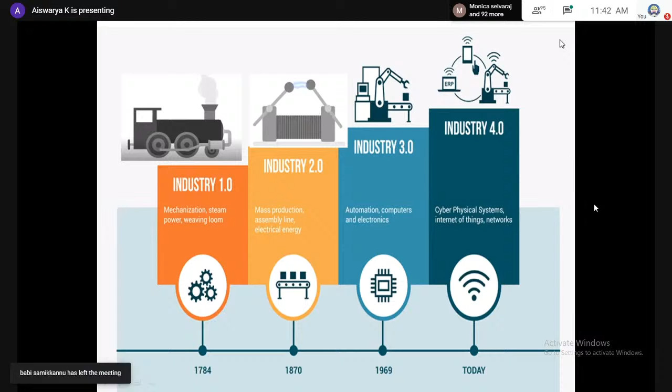With further development and enhancement, we move to Industry 4.0, which has developed recently, as of now. Today the world is most expecting Industry 4.0, which is used for cyber physical systems to monitor, analyze and automate business development. It is a single-hand manipulating process that takes place, so it is better than Industry 1.0, 2.0, and 3.0.

These are all world growth initiatives. In our India, the Make in India evolution takes place in this development. Initially Industry 4.0 was developed in certain countries, and different countries have their own growth initiatives. The smart industry is also called Industry 4.0, which is used to enhance cyber physical security systems. So this is Industry 4.0.

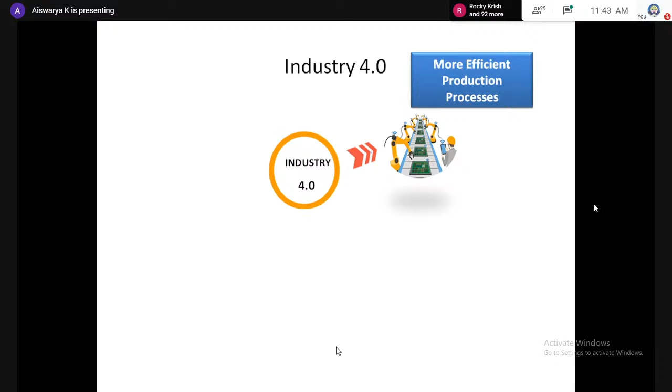Industry 4.0 is categorized into three different options. One is providing a more efficient production process, which keeps on developing massive production autonomously. The second process is called new marketing business models, which is innovative and automatically develops new methods, ideas, products, etc. That is innovation, with single-hand production taking place.

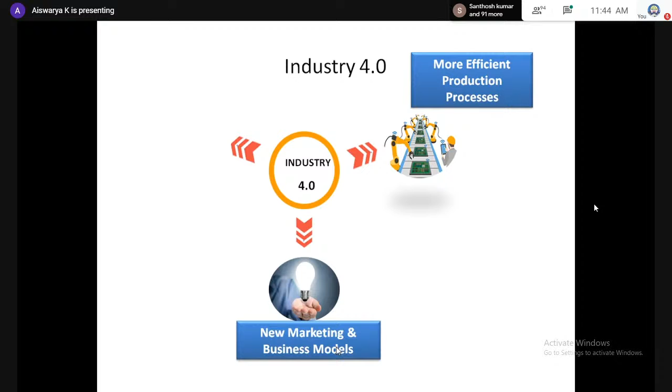Another option is providing stronger customer centricity, which is the ability to move quickly and easily in the customer satisfaction process, making it more efficient than other industrial standards.

So this provides more efficiency and innovation agility. Agility is the ability to move quickly and easily in the customer satisfaction process. Innovation means carrying out a new method, idea, product, etc. So we autonomously achieve single-hand manpower operation.

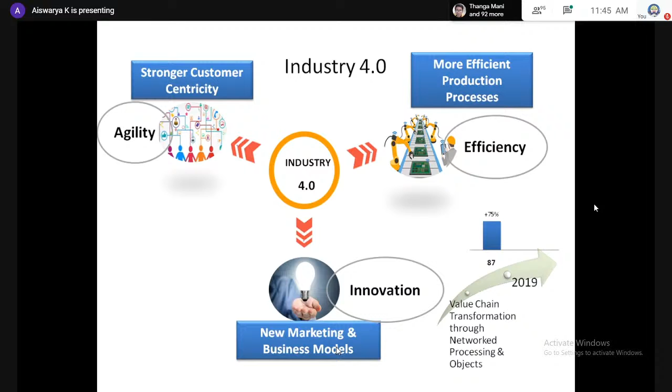Industry 4.0 further enhanced its development in the year 2019. These are the cyclic aspects of Industry 4.0: digitalization of all our data, sharing it with business models. All this digitalized data is in the form of zeros and ones combinations. Whenever we make any money transaction process, we receive an OTP concept, right? So for one-time password security purposes, we ensure the OTP.

For all the technology digitalized to secure the data communications in the value chain process, and then second is sharing the digitalization with the help of product and service offering. Third is digital business models and customer access. Across that we have different technologies which ensure Industry 4.0. Here I have categorized the 17 different technologies that explore Industry 4.0 in the year 2020.

3D printing is the construction of a three-dimensional object model. So the three-dimensional object model is called 3D printing.

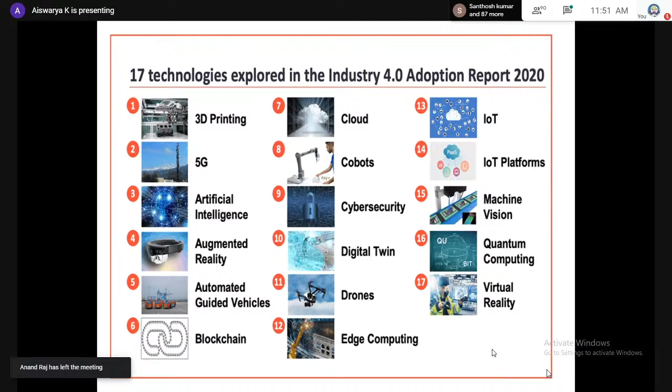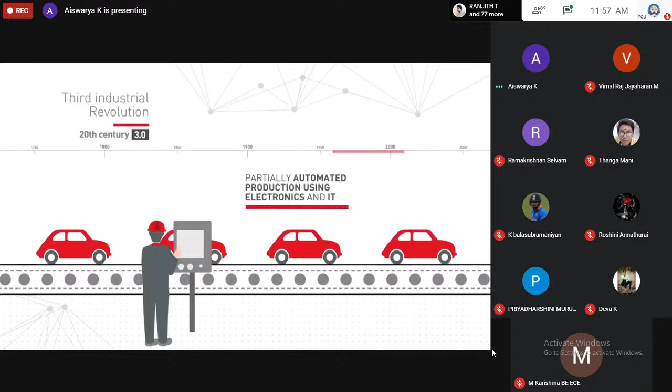These are all a digitalization process for the customers to the industries. Here all the combinations of data will be zeros and ones.

Next we discuss the autonomous mobile robots in the KUKA company. Orange Intelligence.

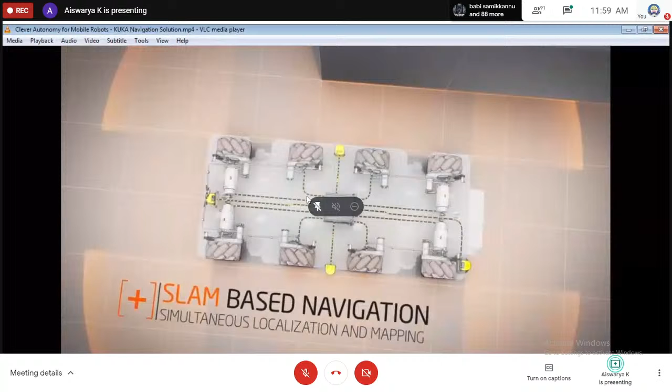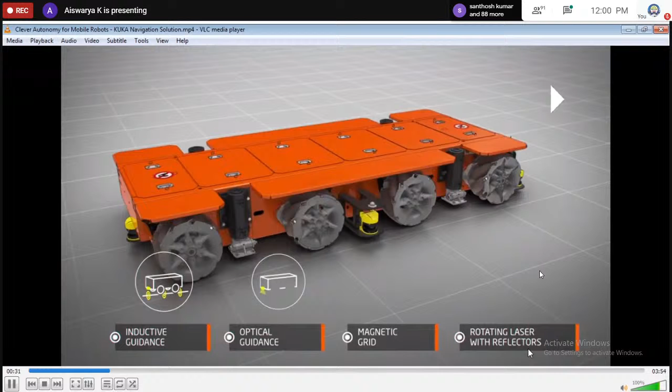In developing the autonomous vehicle, there is no inductive guidance, optical guidance, magnetic grid, and rotating laser with reflectors. Here we combine data of the laser scanner and wheel encoder, so everything is handled in the autonomous vehicle.

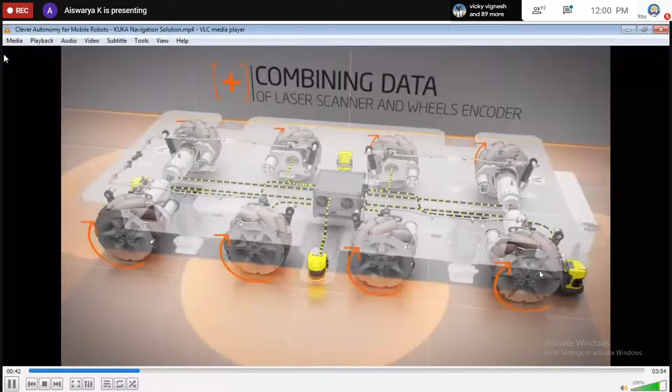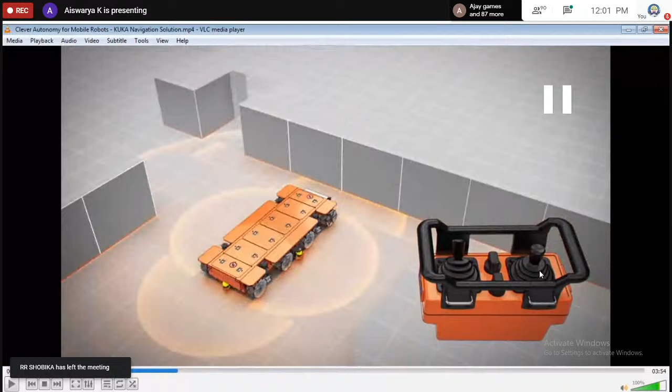So we have the controller. We are able to share the particular locations, so wherever we want to go, that can be adjusted.

For that, we are creating map navigations.

This provides a user-friendly interface. We fix one source and fix any other location, and wherever we want to go, that location is simply chosen.

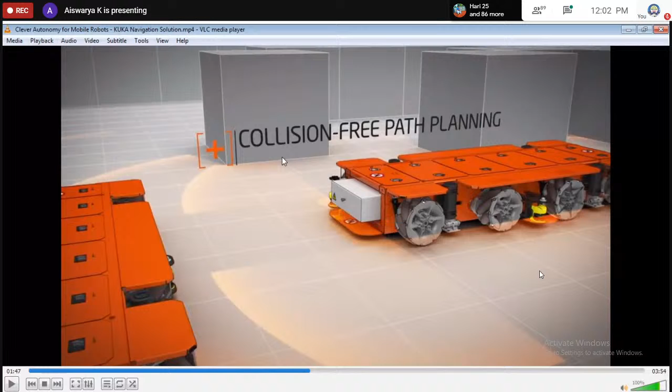There is no accident taking place; this is called collision-free path planning. If any other vehicle crosses over nearby, no accident takes place, so it controls accidents through collision-free path planning.

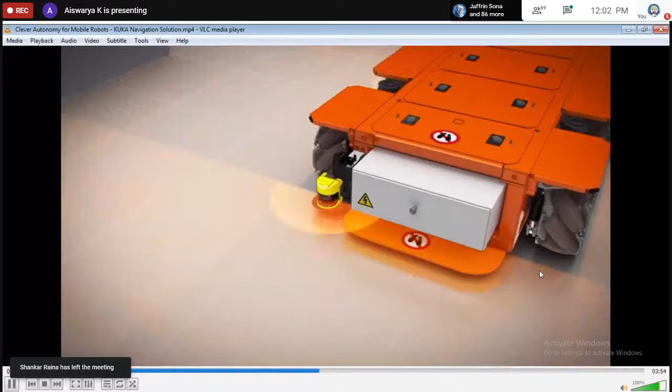We alternatively reroute to another direction, which is called dynamic rerouting. We have to change to another location because nearby there are no other spaces available, so we have to choose another path. That is called dynamic rerouting.

Here we have an orange colored, three-vehicle autonomous system, and all the autonomous systems are going to combine.

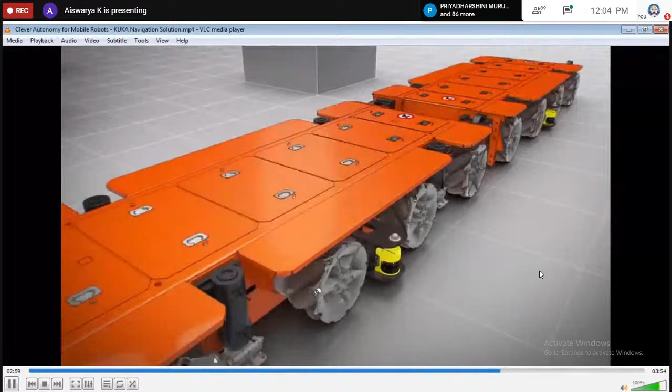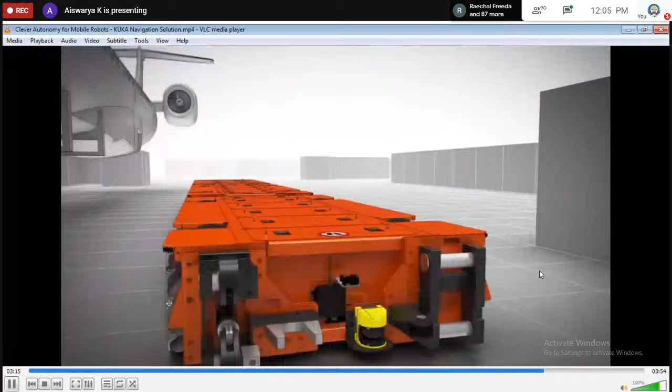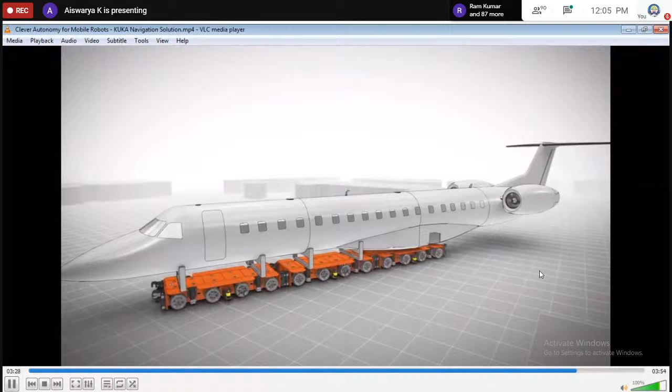All three autonomous vehicle systems are combined, and then loaded with the airplane, and then we choose the particular place where we want to fix it. This autonomous vehicle system is developed by the KUKA company.

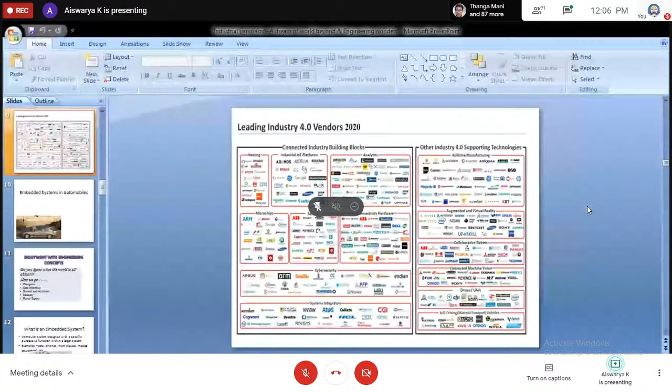Yes, in regard with the embedded system in automobiles, how do engineering concepts lead to enjoyment? Do you know what the world is all about? Here we go.

Power supply is a highly important electrical source that makes your system operate. Computer - as Bill Gates said, each and every desk that runs on Microsoft has been a reality right now. User interface - artificial intelligence is ruling the world. Next comes sensors and actuators that sense and actuate, processing and manipulation work done by these two equipment, which leads to industry automation as well as automation of home systems. A smarter Alexa is the best example.

Next is memory. Memory is very important to store the data. So these are the important components that make engineering concept an enjoyable one.

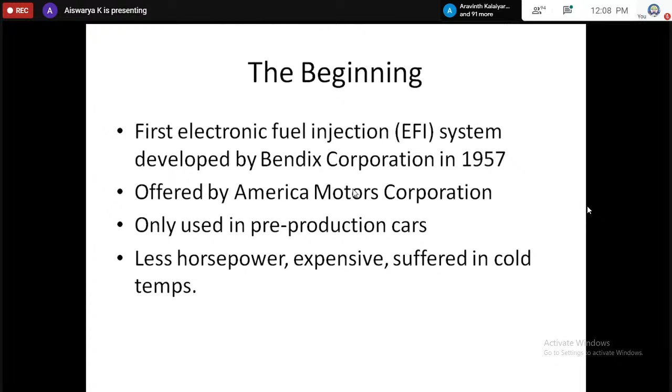The beginning. As all systems have their own beginning, it started in the year 1957, and the first automated embedded vehicle has been offered by America Motors Corporation. This car has been developed by Robert Bosch, a Volkswagen Type 3, in 1967.

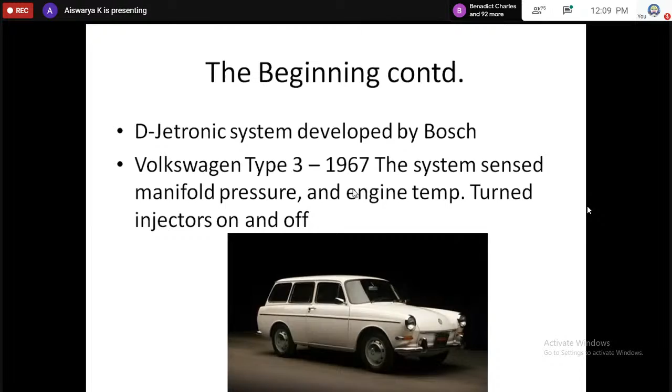What makes this car more specific? It is because it has a sensed manifold pressure and engine temperature that makes the system automatically turn its injector on and off. The first electronic control system was invented by Chevrolet Cosworth Vega in 1975, after the invention of Robert Bosch.

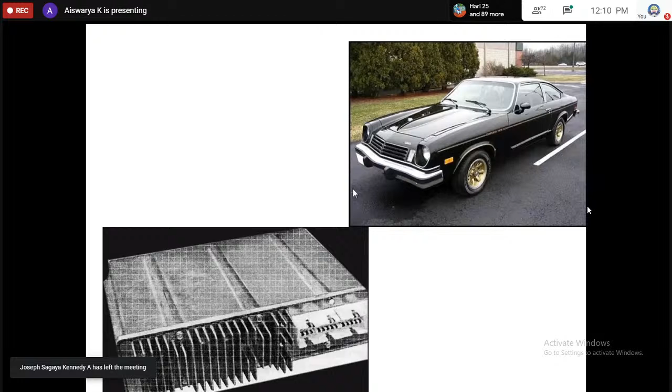Vehicle population in India has been tremendously increasing over the years, and that becomes the necessity which is the mother of invention. Now, as far as India and other countries, the population of vehicles has been running beyond, so even then we could predict that the traffic has also been increasing.

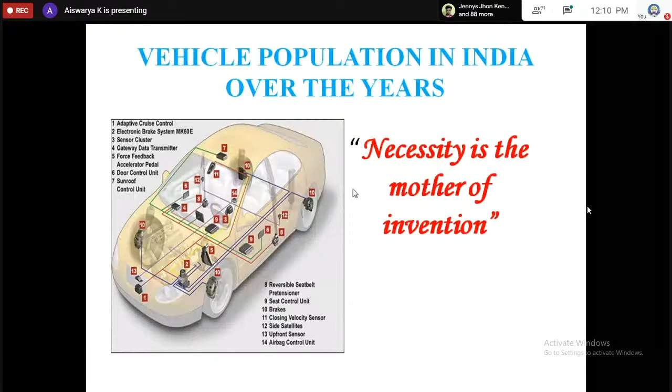Don't keep your eyes on the road. What does it mean? The embedded system is going to make the vehicle driverless. All is going to be automatic, running on ACC, which is called Adaptive Cruise Control. We have a video on that.

So this is generally a car that we drive. Imagine we are driving a car on a road, a 4-lane road. So you need a car with ACC because it has radar, GPS, and everything with sensors to tell you where the obstacle has been and the distance between the obstacle and yours. This highly reduces the fatal accidents that are normally the reason deaths are increasing at a literal rate.

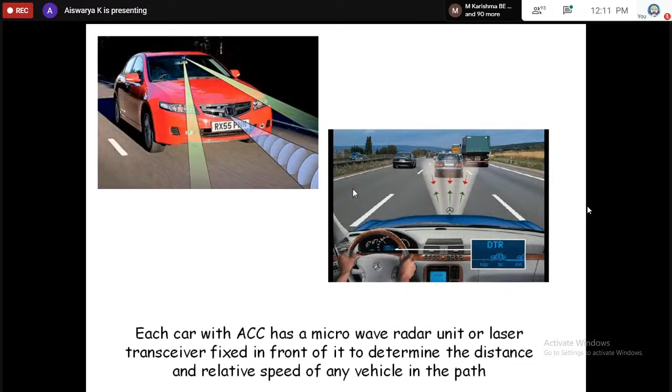The working principles of ACC. As we know, each and every car that runs on ACC, even now the bikes that we have work on automotive embedded systems, even automatically electrically charging. The electrical charging capacitors are built into a vehicle, a two-wheeler vehicle, which makes your system, whether four-wheeler or two-wheeler, automatically gain its power.

That is the principle of the Doppler effect. So in each and everything, it relies on basic physics, chemistry, maths, and all put together stands with engineering.

The first microprocessor. What does a microprocessor do inside an automotive system? Here comes the answer. It was invented in 1976 by Aston Martin. It is the first car that has a numerical display, a display of speed, the display of the panel that we have in front. So the cost is 3 times the budget of the car, but not necessarily the cost of the Mercedes-Benz right now.

Next is digital ECUs, as we call the electronic control unit. It was introduced in the mid-80s. It has a closed loop control. Probably a closed loop control is not much as we think - it is just the action of sensors, actuators, memories, and all those systems that get embedded into a single unit.

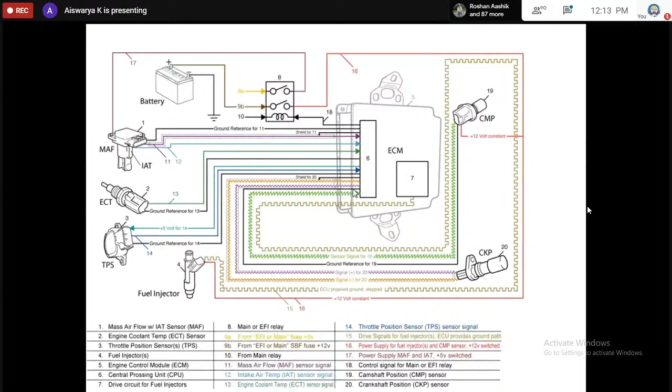So this is basically the outwork of how a car and how these embedded systems get embedded in a car. And how about the sensors, actuators, and the other advancements in the recent scenario? These are called the embedded system components.

For easier diagnostics, each and every module will be combined into a central module, which is generally a server that can automatically control it in an efficient manner. It can communicate errors to a diagnostic tool.

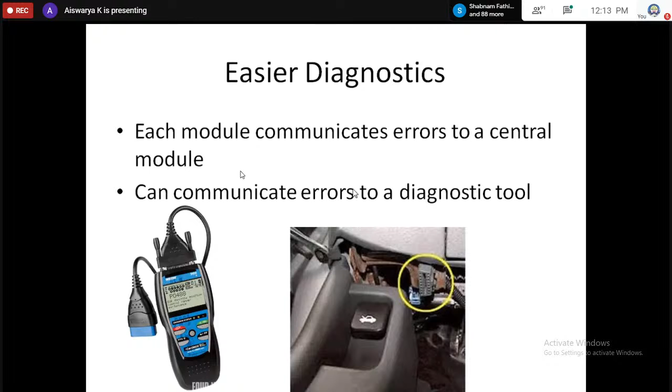Next is an instrument cluster. What is an instrument cluster? The instrument cluster is again a part of the electronic control unit, which sends a packet as information. A cluster is nothing but a group of information all put together into a single module.

The other module we know is that even two-wheelers right now come with an anti-lock braking system, the ABS system. Automatic brakes can be applied simultaneously, which reduces skidding of vehicles in areas where it tends to be very slippery. Next is the airbag, which is one of those protective measures when we face an accident, providing the first emergency help.

Next is called the security system. So when your car is being tracked or taken over, you can easily track where the car is moving, using the equipment that we have. Next is the keyless entry.

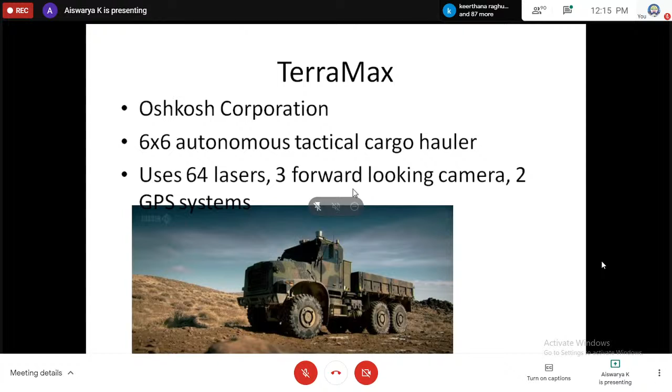For an automotive embedded system, for example, take a LiDAR car. This is called the TerraMax car, first innovated by Oshkosh Corporation, China. It has 64 lasers, 3 working forward-looking cameras, and 2 GPS systems, mainly used for military and surveillance services 24/7. This has been the surveillance camera where you could easily predict and zoom into the exact coverage area with the satellite terrain.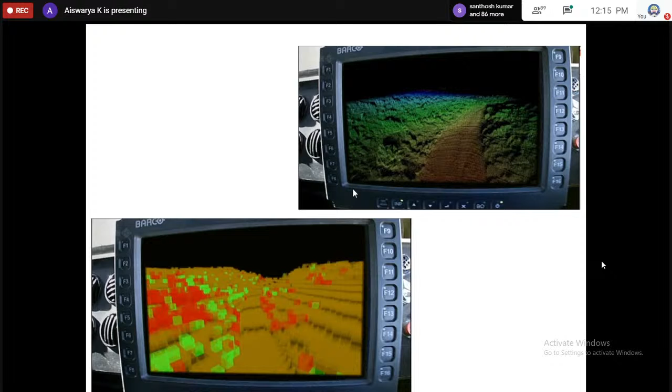Next is Google's LiDAR. This was the recent innovation done by Google. It is going to be released in the next 5 years, and it's realistically going to be the best car in 2020 and 2021.

But there are certain issues in Google's car. One is called lane markers in snow. When we use this LiDAR car in areas where the snow or mist is eventually high, it doesn't have any lane markers, so there's a possibility of a fatal accident.

Next is unmapped road changes. For example, the layout of the road gets suddenly changed due to some traffic. What happens is the car eventually doesn't have any sort of such information.

Next is traffic officers, performance standard, and price. It is quite high compared to the other cars running in the market. So these are the wide big issues in a Google car, which make it deteriorate compared to the other cars rightly available now in the market.

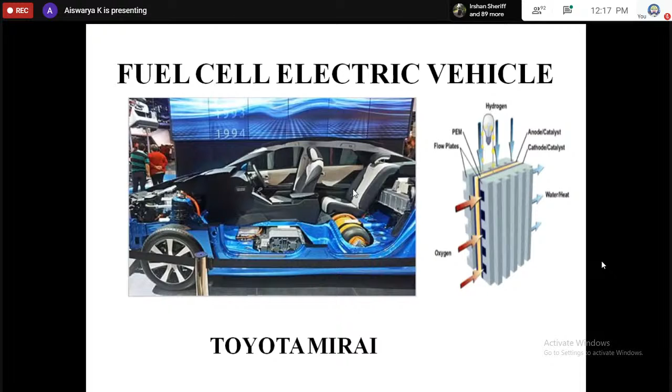This was currently working out in Belgium, and it will eventually take years to come to India.

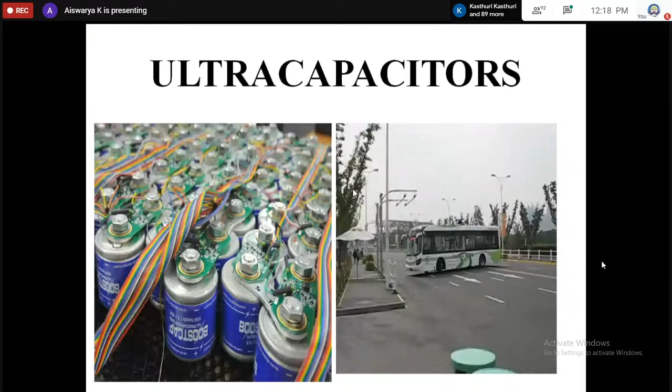So here we go with a few videos in order to make it even more graspable with the concept.

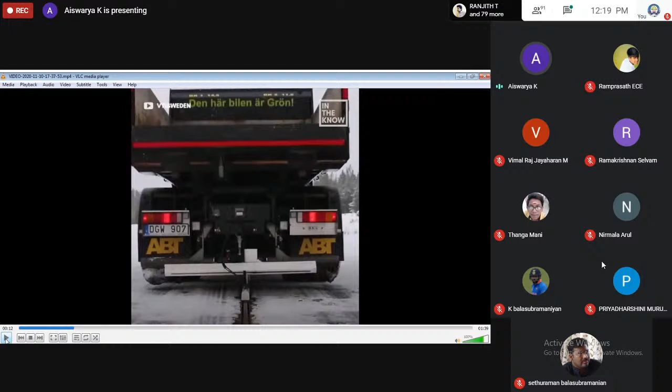It's the first electrified road in Sweden. The road has two different lanes where it gets electrified by the motion, the general friction that takes place between the vehicle and the road. It gets automatically charged.

Here they show how it works. Generally, while bearing the load, it gets used up with the electrical rail that has the friction. So once it gets friction with the road, automatically a line or the electrical socket comes from the vehicle down to the lane and it gets charged.

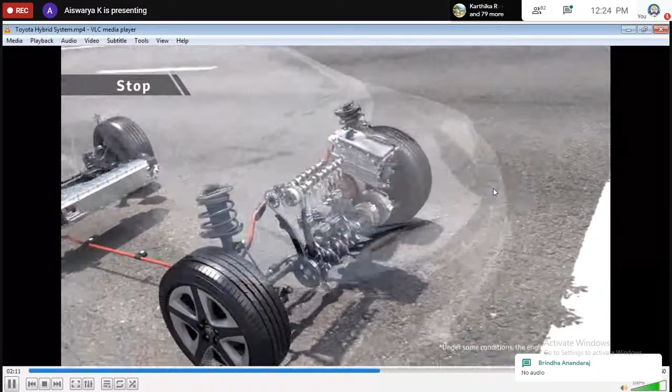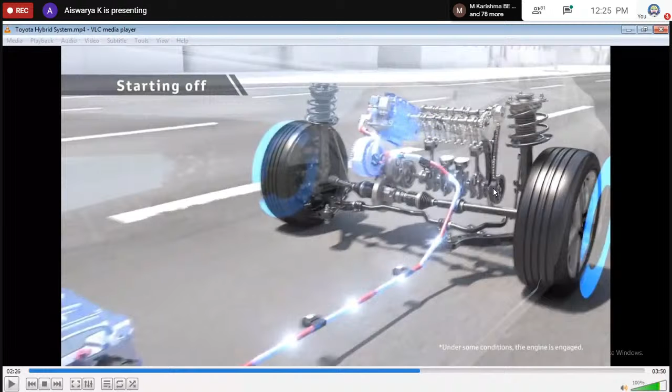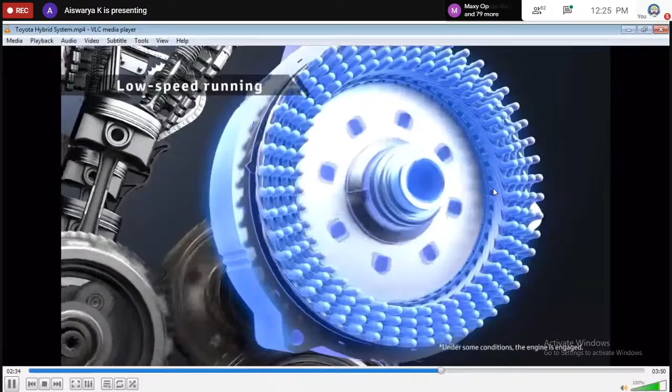Ma'am, sorry to interrupt you, there is no audio. Aiswarya ma'am, sorry to interrupt you, there is no audio. Is it audible now, sir? No ma'am, low speed, yeah it's okay. It's okay, now it's audible. Okay.

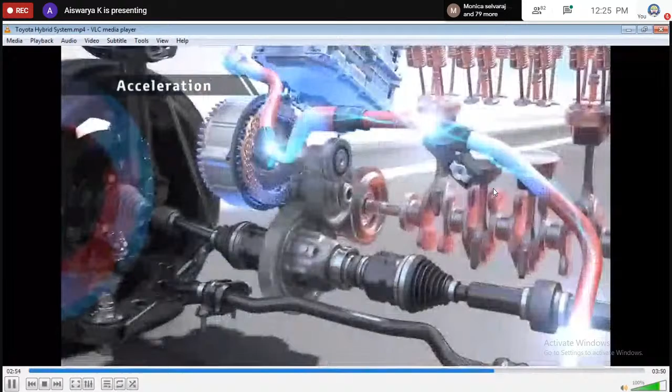During acceleration, motor drive is combined with engine drive in a rotation range with good engine efficiency to drive the vehicle powerfully, yet with low fuel consumption. The engine drives the vehicle and charges the batteries at the same time to raise the energy efficiency.

During deceleration, the rotation of the tires drives the motor to generate electricity to store the power into the batteries for reuse.

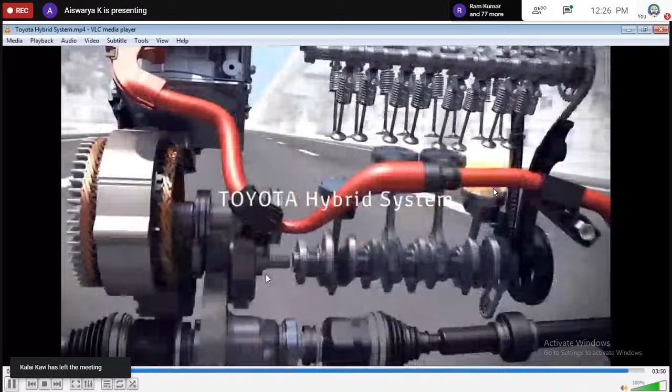In this way, a Toyota hybrid vehicle runs the engine in a rotation range in which the engine has good efficiency and that matches the driving conditions, and reuses energy that has been wasted until now, achieving low fuel consumption driving. The Toyota hybrid system is advanced technology that achieves both driving fun and superior environmental performance.

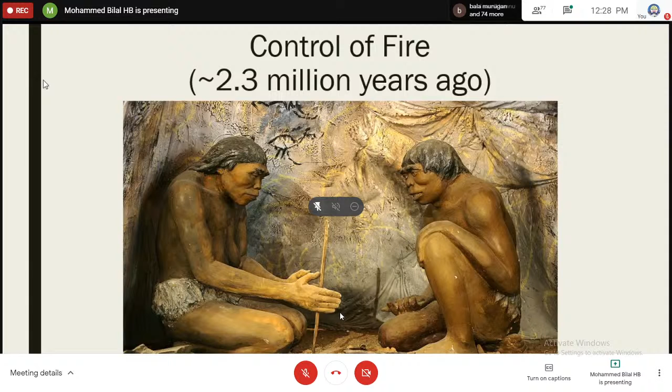Talking about the evolution of engineering, we could say when man started to control fire, a million years ago, that's where engineering started. Reports suggest millions of years ago, but some people say approximately 2.3 million years ago, the species Homo erectus, our ancients, controlled fire.

The next evolution will be the greatest invention, you could arguably say, the invention of the wheel, around approximately 3,500 years BC. Initially, the wheel was invented for pottery making. Later only, it was used for vehicles and in chariot form. And then things only got better.

The next invention will be the nail. Just think about it, why the invention of nails is included in this list. Think of your furniture or fittings without this small piece, how things would be. Then we could understand the importance of nails in our daily life and why this is such an important invention in the evolution of engineering. The Greeks actually invented nails.

The next one will be the compass. Today we have this in our handheld devices, the mobile phones, in the form of GPS. The Chinese actually invented this compass in the 12th century using magnetized iron ores. And today we have GPS for navigation systems.

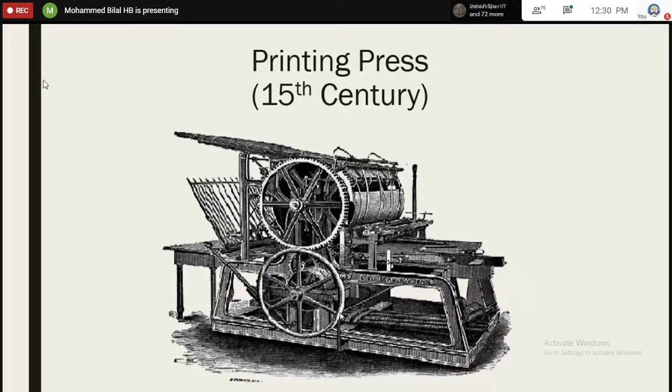The next invention will be optical lenses, in the 13th century, invented by Egyptians. And again, the printing press in the 15th century by the Germans. You could say why they are the best mechanical engineers in Germany from this invention.

The next one will be the steam engine, around the 18th century. And then later, James Watt in 1781 patented and improved the steam engine, and it started the industrial revolution.

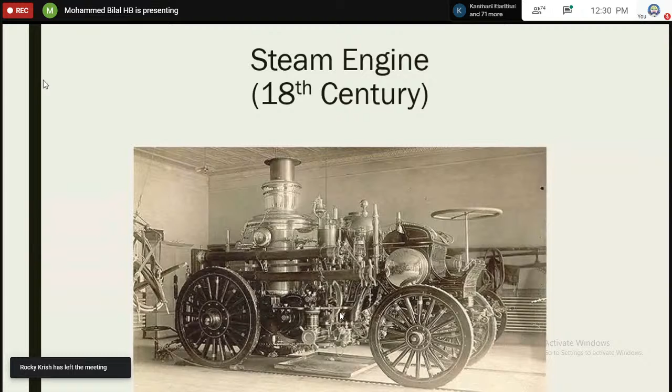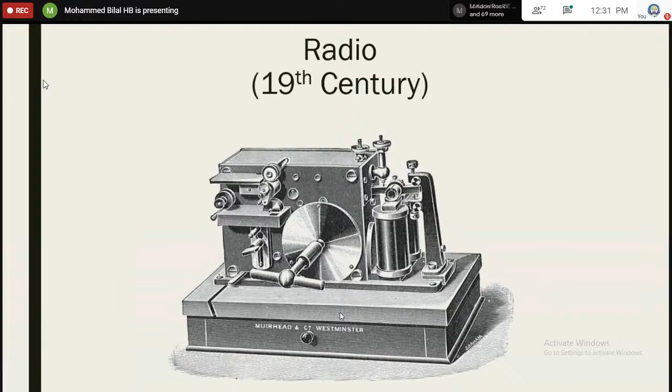Next will be the 19th century invention of long distance radio transmission. It's an important piece of technology for modern life, the beginning of everything we have today in wireless communication. Around 1895, the radio was invented by Marconi. Next one, electricity, 19th century.

Initially as DC and then AC. There was an argument about which one is better, which continues till date. Initially it was DC by Edison, and then AC current.

The next one, battery. Previously used during war times, these were invented by the Iraq people around 2000 years ago, the prehistoric battery. Later in the 19th century, the technically advanced battery we see today, the first electric battery, was invented. It also laid the foundation for electrochemistry.

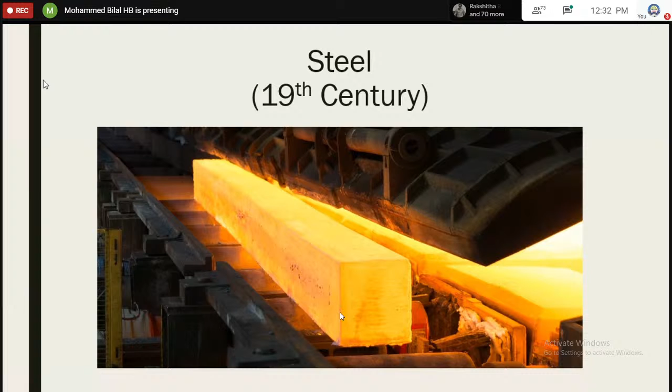Next one, invention of steel, 19th century. Actually, the production of metal dates back 4,000 years as per archaeological excavations, but using the Bessemer process, which you could have studied in chemistry, the wide production of steel began in the 19th century.

And then the very famous one, petrol, the reason for many wars and many conquests. Petrol was invented in the 19th century. Previously, petroleum was discarded, and only later was it accepted as a fuel.

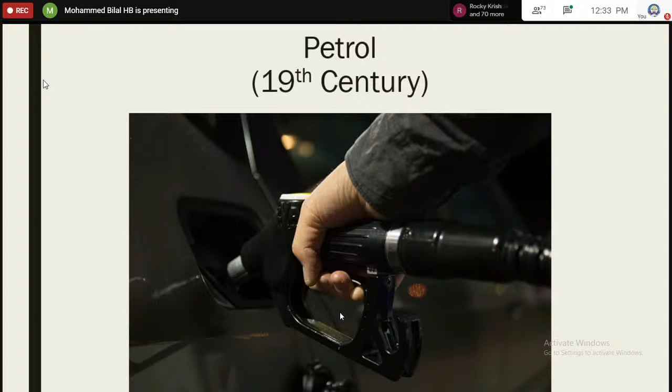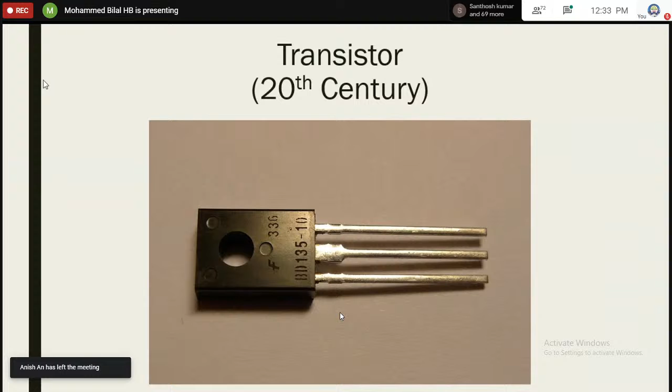Then 20th century inventions, the transistor, for which the Nobel Prize was given in physics. Again, the internet, also a 20th century invention.

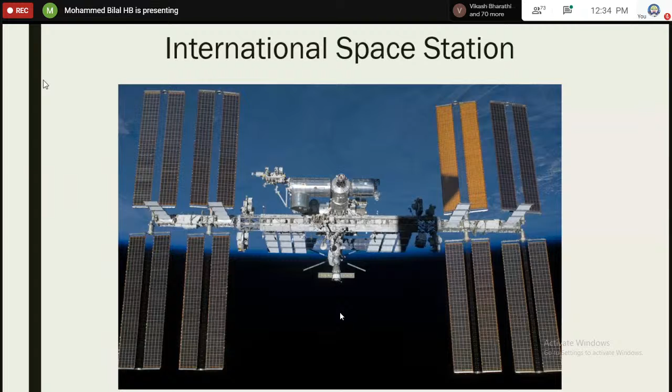International Space Station. Speaking about engineering wonders, usually we think about structures, but here I'm going to cover all engineering disciplines. The first one is the International Space Station. It is so large you can see it with the naked eye from Earth's surface. It was launched in 1998, and it is the largest artificial object in orbit till date.